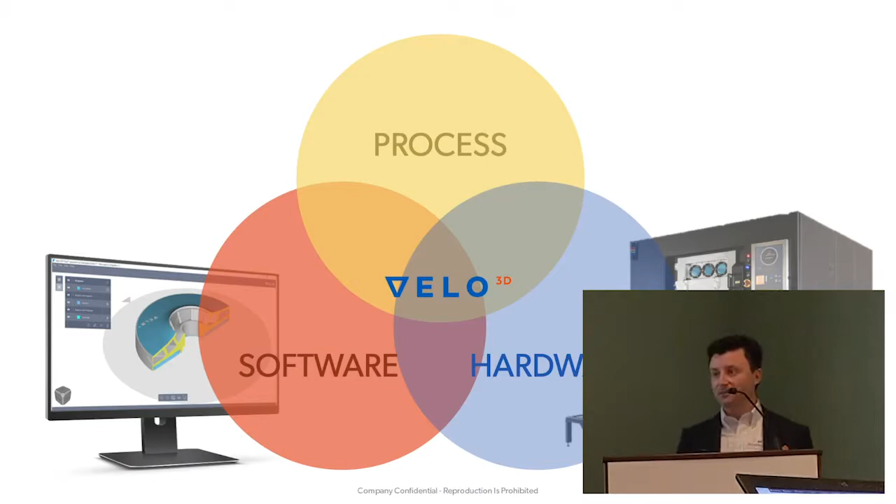In many cases, production means melting metal faster. I think one of the big things we have to focus on as we move more into production is reducing part cost. The best way to reduce part cost, because most of it is associated with machine amortization, is really to melt metal faster. It's honestly that simple in most cases.

There are a couple ways you can approach melting metal faster. One approach is if you have a 400 watt single laser system, put an 8 kilowatt laser on it. You would absolutely melt metal faster, but it would probably not give you the outcomes you want. The material probably isn't quite what you're looking for, and the resolution wouldn't be great. So maybe it's not the best solution.

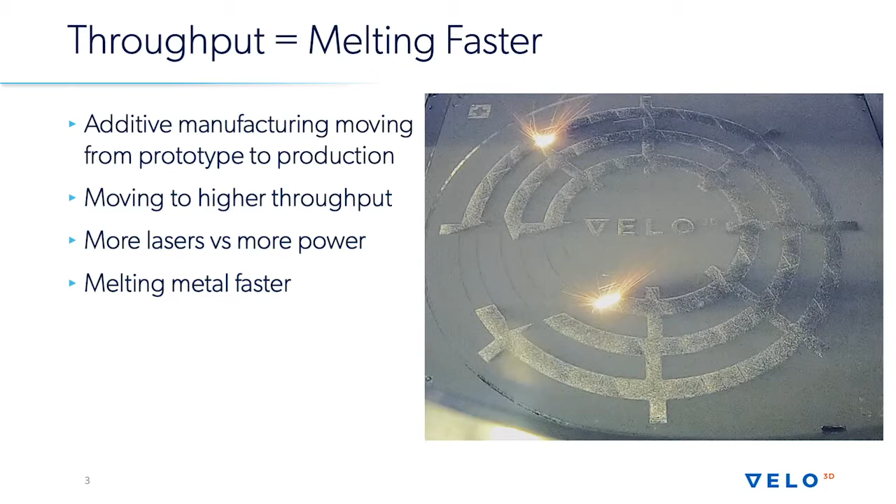The other solution is to add more lasers. If you add more lasers, you can melt metal faster and still do so within some of the limits of physics when it comes to actually melting metal and making good material at the end of the day. So more lasers means melting faster. That's the goal of serial production.

More lasers is not necessarily an easy thing to implement. I think there's a lot of complications, and some of them are very subtle when it comes to multi-laser systems. So I've outlined four issues you might run across when working with multi-laser systems in a laser powder bed setting. The first one is laser alignment.

In medical orthopedics, you are printing thousands of small parts in a lot of cases. If you're doing hip cups or spinal implants, you can print very small parts, and in that case laser alignment isn't as critical, because you're able to assign one laser to each part. In the case of big parts, if you want to really capitalize on the throughput increase of adding multiple lasers, you're going to have to build one part with multiple lasers at some point. So laser alignment becomes very critical there.

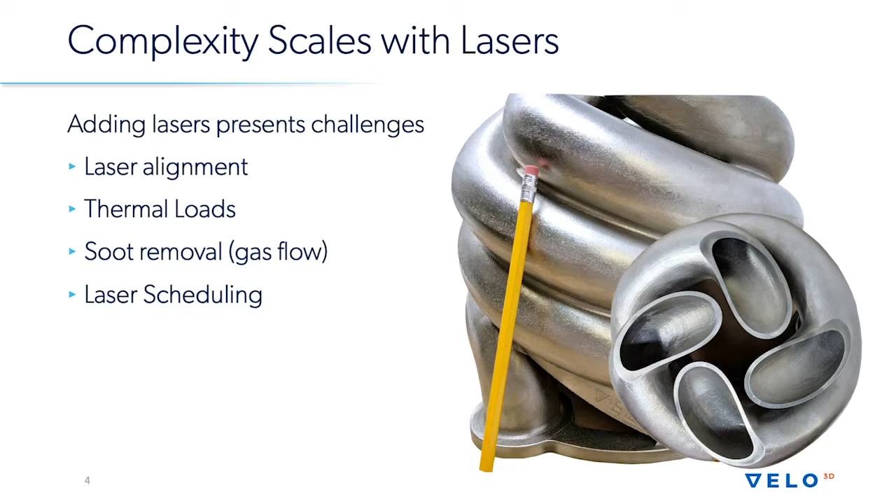Soot removal - I think it's pretty widely recognized that gas flow is a critical aspect of building good parts in laser powder bed systems. Soot removal when you're melting 4 times as much material is equally critical. You can generate quite a bit more soot, and you have to deal with that. That can be in the filtration system, the gas flow, the inlet and outlet design, but also in the laser scheduling. That's a big part of what you have to consider when you're looking at multi-laser systems - how to effectively schedule lasers to optimize throughput while still making good material at the end of the day.

So just to go into a little more detail on each one of these, we'll start with laser-to-laser alignment. At its most basic, laser-to-laser alignment is when you tell the machine to point a laser at a certain point, making sure that multiple lasers actually point at the same location in X, Y. That's one aspect of it, and it can be challenging. Each scan head has 2 galvanometers in it, and you have to make sure the galvanometers are mapped correctly so that each scan head makes sure the lasers are pointed at the same location. It has to be pretty accurate here.

The other thing is that the focuses have to match, right? You can't have different spot sizes from different lasers at different locations over the plate. Your focal planes have to be parallel, and they have to be on top of each other, and your laser-to-laser alignment has to be pretty spot on.

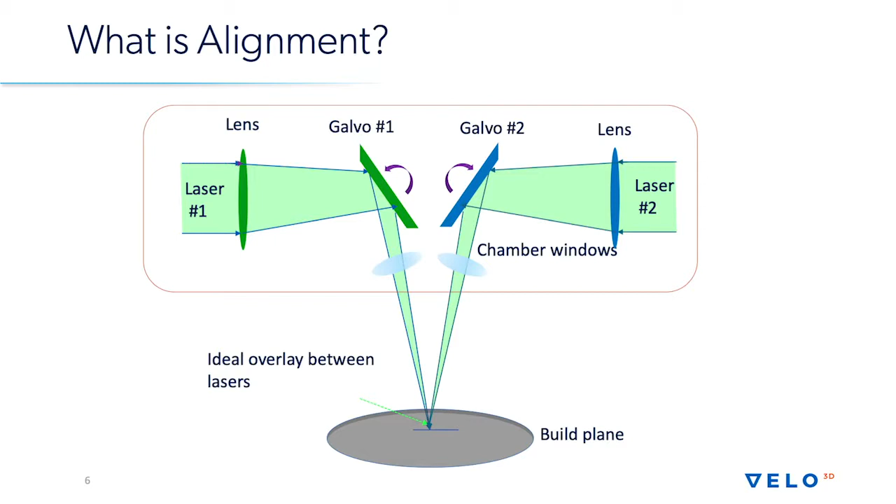So if your focusing optics are moving away from your build plane, your point where the 2 lasers intersect moves, and your build plane is moving through your focus. What that does is it induces a shift in one axis, but not in the other. In the other axis, both of your lasers are pointed at the same point, and whenever your build plane moves, all it does is change the dimension of your part. So you'll lose dimensionality in one axis, but you'll lose overlay in the other axis.

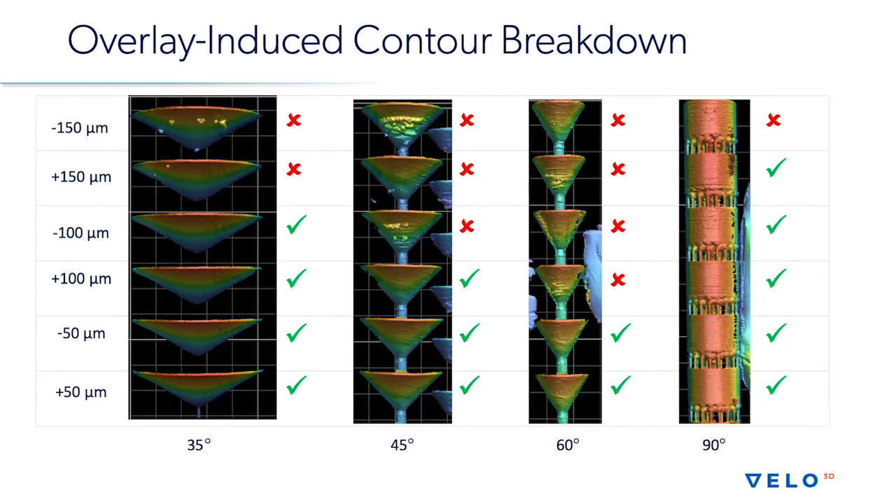We have a number of other tests. We've established that a 50 micron offset in overlays is generally good enough in terms of porosity, in terms of mechanical properties, in terms of the surface roughness. So 50 microns is the spec we set as an acceptable limit. That doesn't mean you shouldn't try to do better, but 50 microns is a good place to be.

So with the definition of laser alignment and the requirement we're trying to hit, I want to go through a thought experiment about printing a part with a multi-laser system.

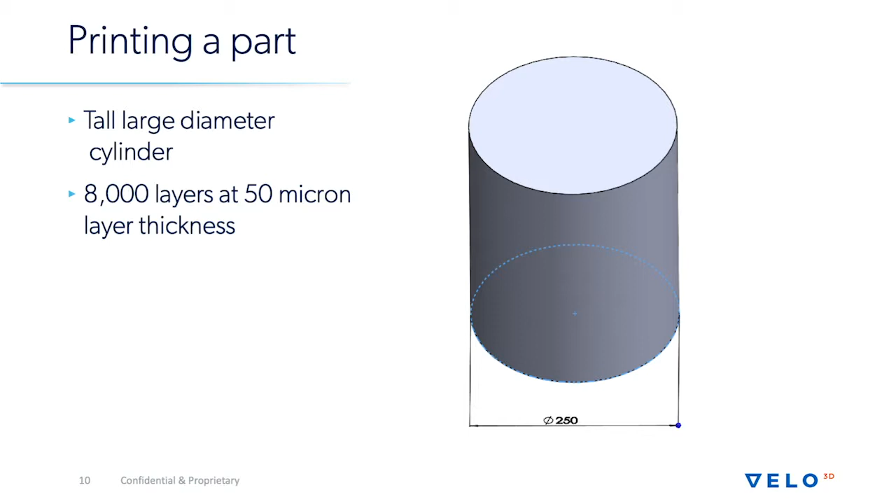And just look at how the laser-to-laser assignment and scheduling actually kind of works in the real world.

One of the issues you can run into with large parts is alignment stability. I think the previous presentation highlighted that this is something you should actually care about. It can change, particularly because your galvos, the encoders, can drift apart. You can have thermal changes in the system itself. And all of these lead to alignment shifts, basically.

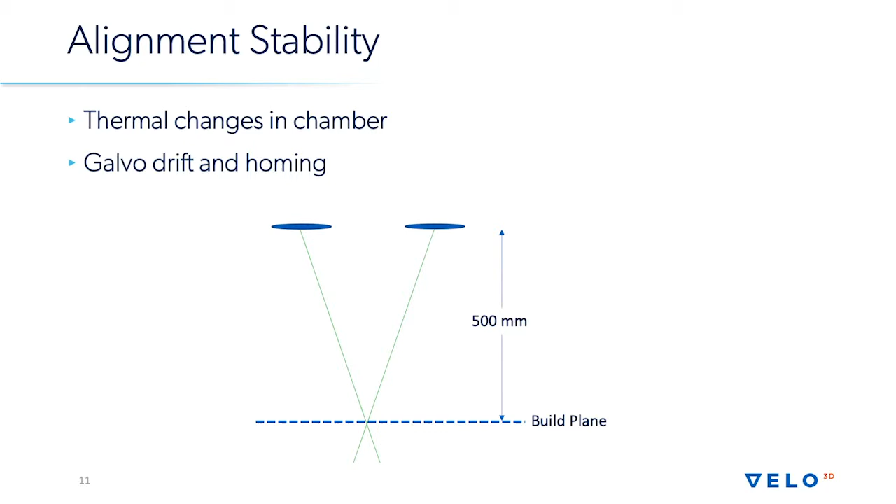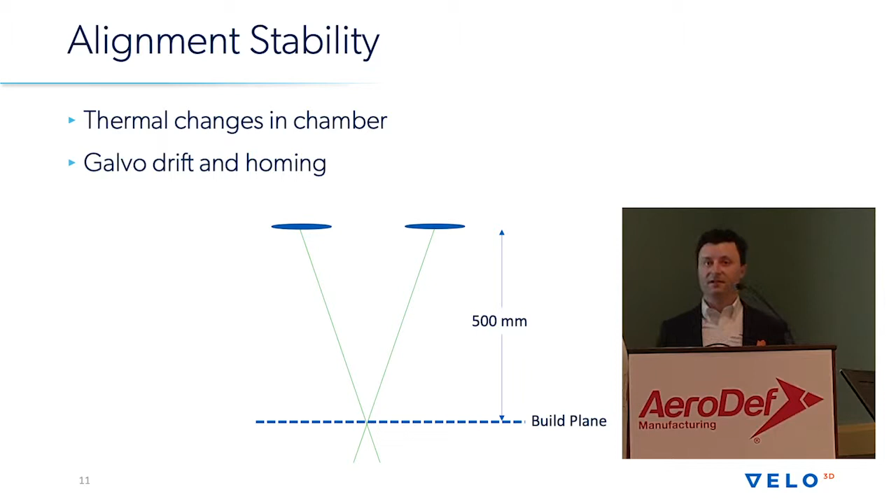So you've basically blown your spec already with a 15 degrees C change. And while 15 degrees sounds like a reasonable amount of change, maybe too much to occur during the process, another thing to keep in mind is that when you're doing alignment calibration, most systems do this cold - by putting a plate into a machine, burning marks on it, pulling the plate out and measuring it.

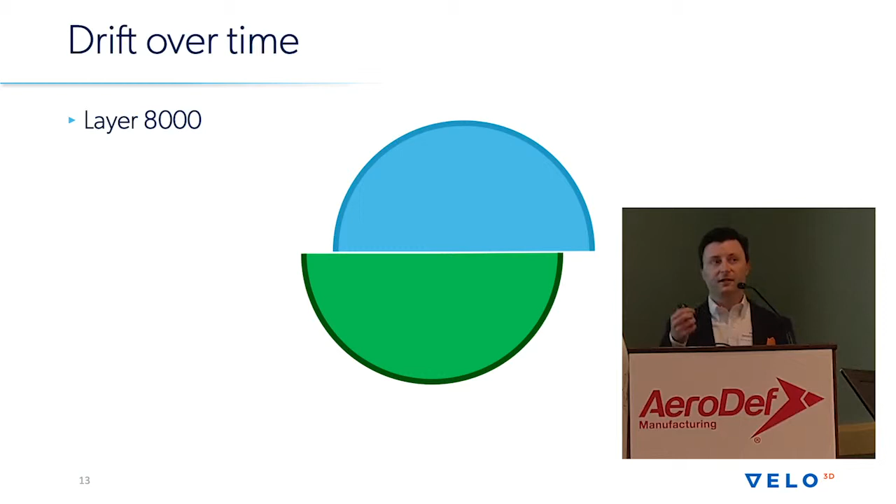This is well and good if your laser is aligned on layer 1, but when you get to layer 8,000, things move. You can see this a lot in the overlay because it will shift as a function of Z - you'll actually start to see more overlay shift as you get higher in the part. And the question then is: is the part good?

You didn't have a pause in the build. You didn't violate some of the build restrictions you might have around building a part for production. But the question remains, what's inside the part? Do I have an area where I haven't fused the metal? On this overlay, is that okay for a dynamic mechanical test for high cycle and low cycle fatigue? It can be questionable at that point.

So it'd be really nice if you could measure the overlay with the machine itself. The machine could basically take a measurement of its own optical health and provide you a report. So one of the things that Velo is really focused on is in situ metrology, making sure that the system can monitor its own health and provide that feedback to the user.

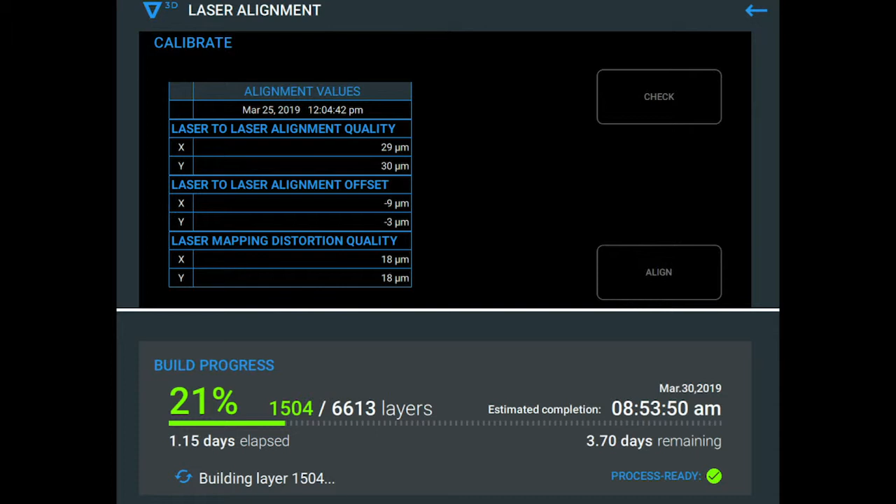This is an example, an actual screenshot from our machine user interface. This is a pre-build laser alignment. We can map the distortion of each galvo independently and then map those to each other, reporting back your calibration values in X and Y for both lasers, and provide this as a report.

This is great, except it doesn't actually address the problem that I stated, which is you drift over time, right? So if you're going to build an 8,000 layer build, the really nice thing would be if you could do this in situ.

So we did. We developed a way to do in situ laser alignment measurements, and you can do this arbitrarily. It's configurable at any layer or any sequence of layers. So we like to do this every 50 layers, 50 to 100 layers.

So you turn this on, and the system starts to actively control its laser alignment in real time to make sure that on every layer throughout the entire build, your alignment is correct.

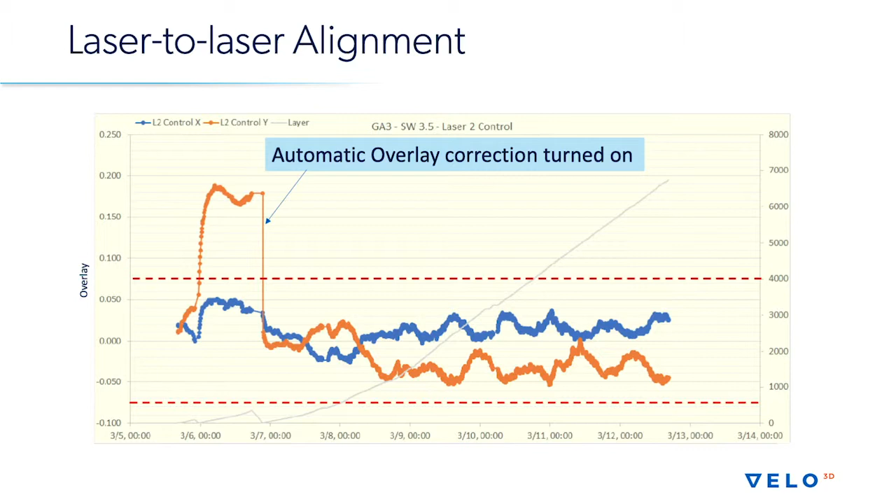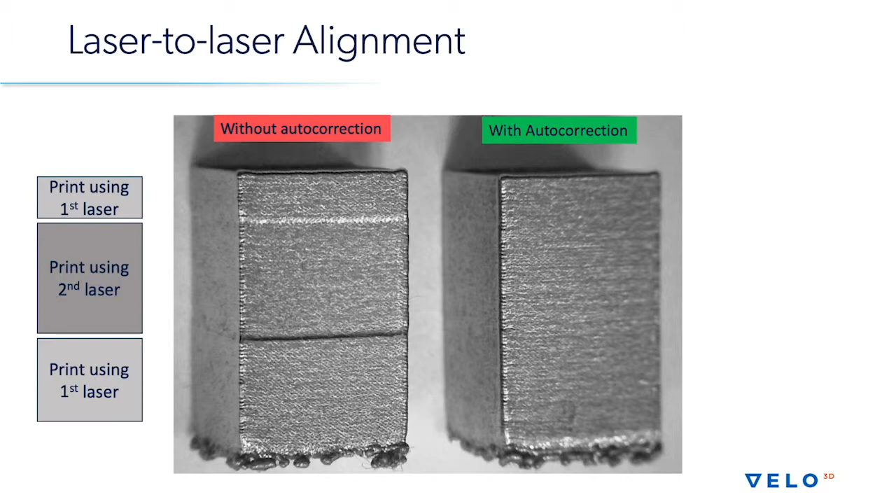What does that give you? It gives you a part with no discernible overlay. So you can actually build parts that look like they were printed with one laser. You're printing them with multiple lasers, and as long as you have this active control turned on, you more or less cannot see the overlay between the lasers. So it's a really effective tool, especially when you're building big parts.

So in addition to alignment, one of the other things that I mentioned was soot removal and laser scheduling. And those really come down to a throughput optimization.

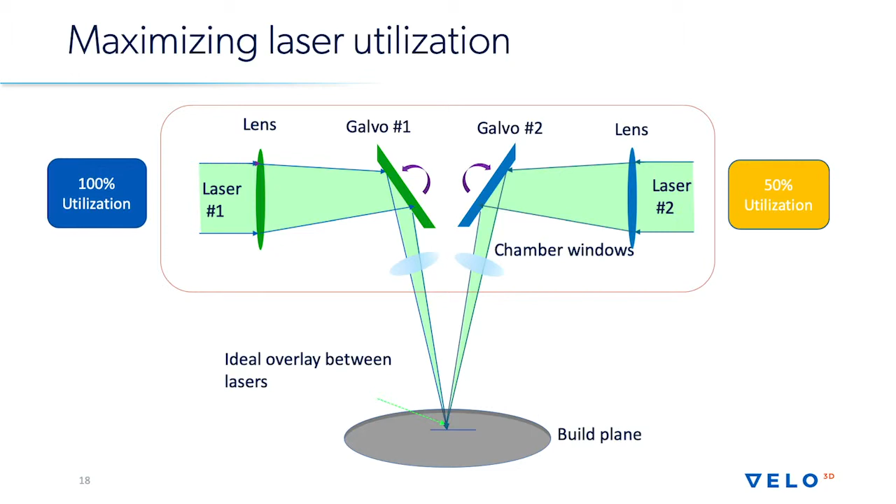One of the things you don't want to do is put two lasers on a system and then run one 100% of the time and the other one 50% of the time. You're not maximizing your throughput if you're doing that. You're wasting a lot of infrastructure and expense to not realize the full throughput gains that you could.

And when you're looking for throughput optimization, there's kind of two parts of this. There's laser assignment—how you break up a part to be assigned to the two lasers—and then scheduling.

Another way that we've seen people approach laser assignment, which is also kind of an interesting way to get past some of the limitations of the previous scheme, is, if you're on a dual laser system, to run core split up between the two lasers, but to then run your contours with a single laser. This is interesting because you don't actually break up the contours, so you don't have this overlay mismatch where the contours are broken up. It's kind of a clever way to get around this.

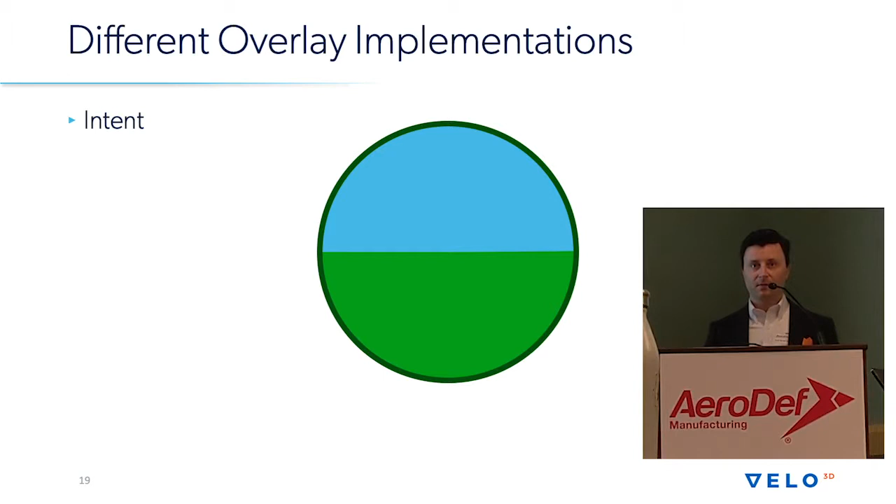There's one issue you need to be aware of, though, which is it doesn't solve the problem again. If your core shifts, if one of your lasers is moving relative to the other one, what this does is mask the overlay mismatch that you'd otherwise see when your contours are done up together.

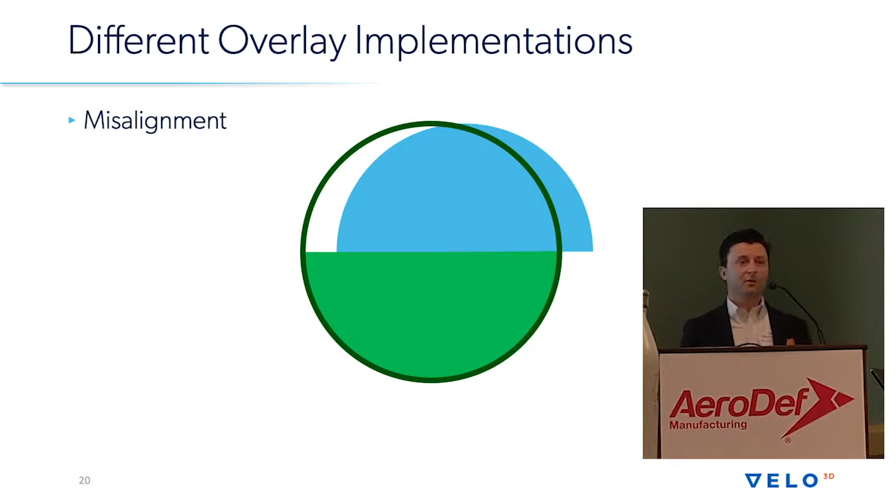As a result, what you really end up with is a subcontour porosity, which can be a sharp, jagged porosity—a real killer when it comes to high cycle and low cycle fatigue. So just because the part looks good on the outside with a single contour scheme doesn't mean the part is necessarily good. It doesn't mean it's necessarily bad, but it's something to keep in mind when looking at different ways to approach multi-laser assignment.

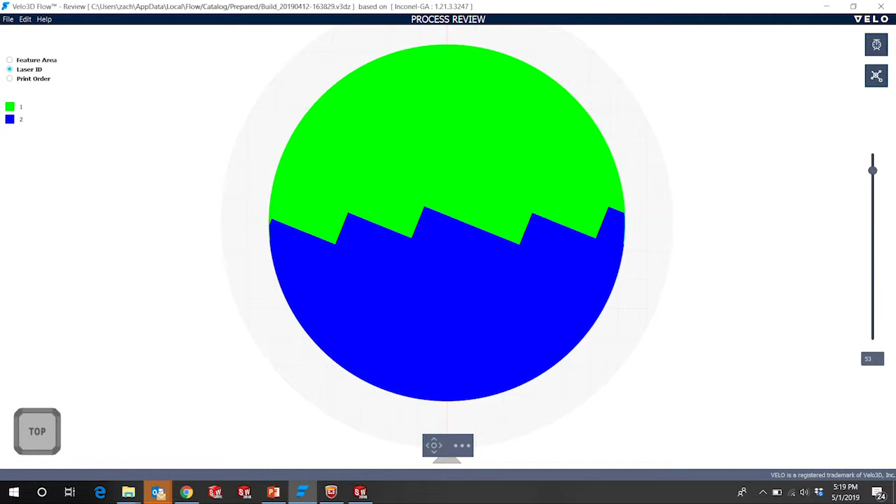At Velo, we chose a combination of approaches that produces the worst possible result if your alignment isn't there. We split the part into two - this is our 250 millimeter cylinder. You can see green contour coming down around the blue core. Not only are we printing the contour with two different lasers, we're offsetting it onto the core of the other laser, so that if you have a laser alignment mismatch, it's brutally obvious. There's no way to hide it, which is good, because if the system's not performing nominally and you're trying to produce aerospace grade parts, you should know if something's not right. This is one method we've come up with to get us to this point.

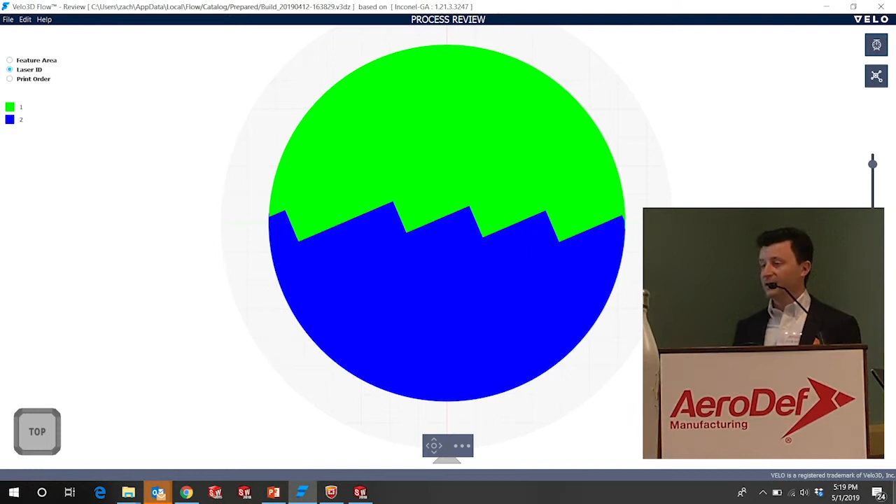The other thing we do is move the interface around - you're always moving the interface around. The reason we do that is because it makes a stronger part. When you're building a brick wall, you don't line all your mortar up in one joint and hope for the best. You interlace your layers and build a stronger part.

The other thing is laser scheduling. Soot is particularly bad if you're shooting through it. Don't shoot the smoke - this should be a mantra for all multi-laser systems. If you shoot a laser through the smoke, you get occlusion, you don't deliver the laser power you intend to the surface, you don't fully melt, and you end up with defects. So it's really important to schedule the lasers appropriately.

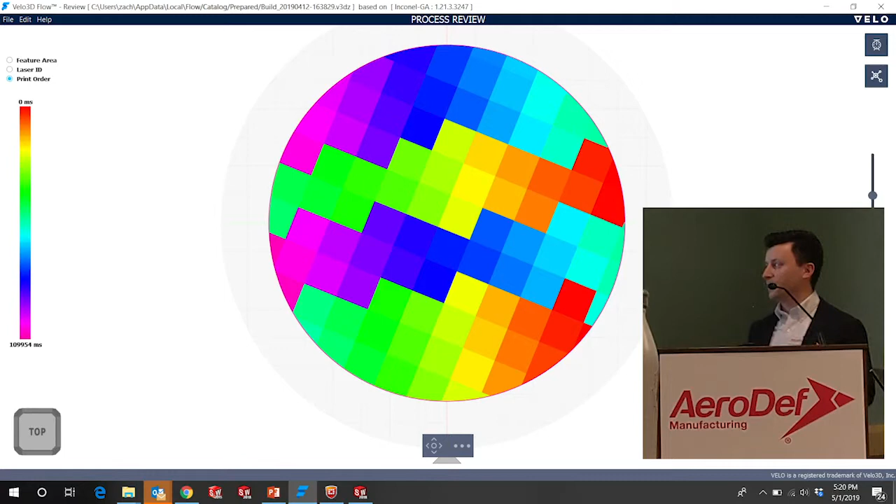The way we approach this is also a little different - we choose a swim lane methodology. This is a plot of the laser print order from our flow print preparation software. One laser starts here in the red, and the other laser starts here in the red. As you progress through the layer, you're basically working upstream on each of these lanes until you get to the end, and then it's switching to the next lane. This way, you can make sure your lasers are never downstream of the other laser - you're never shooting through the smoke.

You can also modulate where this separation is occurring, such that you maximize throughput. This is the method we've chosen to optimize throughput while also not shooting the smoke. Again, this shifts around over layers so that you're building your brick wall.

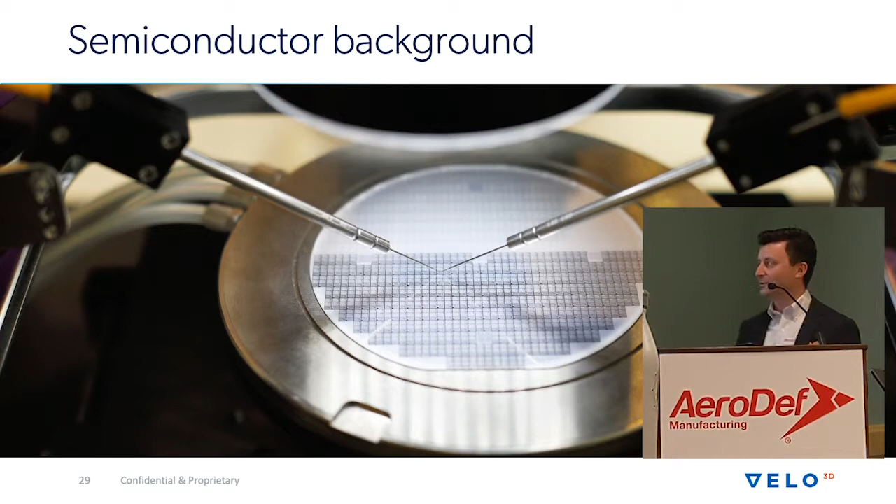Just as a story - when I joined Velo 3 years ago, I was the only person who had any additive experience. Everybody else was from the semiconductor industry, from Applied Materials, KLA, and Lam. Our co-founder, Erel Milshtein, asked me what our spec should be for laser overlay. I said, well, in my experience with previous equipment, something on the order of 50 to 100 microns would be an appropriate laser overlay. He started laughing out loud at me and said, 'You have to be kidding - 50 micron is your spec for laser overlay?' I said, yeah, at that point I don't think you could notice a difference. He said, 'Wow, at 50 microns, that would be a gross failure of the semiconductor equipment. There's no way you could produce semiconductor parts with a 50 micron overlay.'

I think that story speaks to what we're trying to do at Velo, which is essentially leverage the background we have in semiconductor capital equipment manufacturing and process development, and bring that experience into metal additive manufacturing. The systems aren't that dissimilar - they're actually pretty similar when you look at a lot of the components that go into it. When you want to model the most mature manufacturing solution that exists, semiconductor is a great thing to steal from. That's what we're really trying to do at Velo 3D - leverage all of that manufacturing pedigree into a system that's really a production solution for metal additive manufacturing. Thanks, any questions?